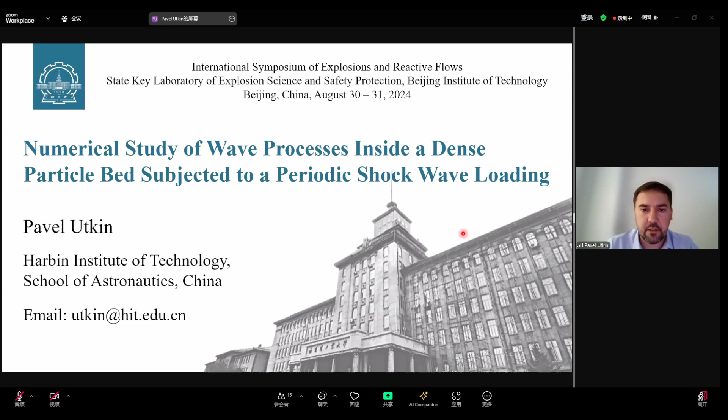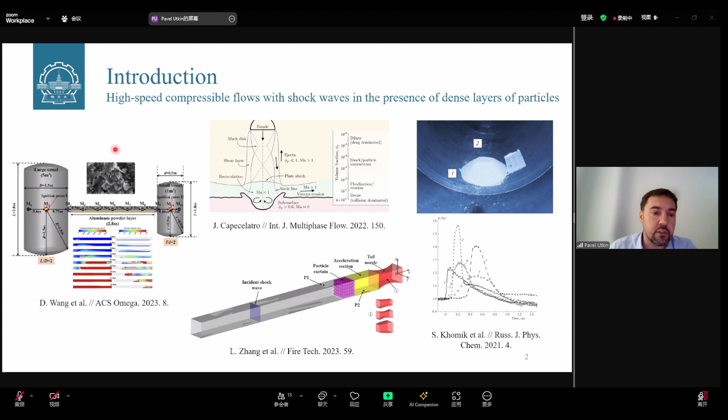The simulation of high-speed compressible flows with shock waves in the presence of dense layers of particles, that is, layers with a significant volume fraction of particles, is relevant in various fields. These simulations arise, for example, in explosion safety issues, such as dispersion of particles behind a shock wave during dust explosions, or explosion safety coatings. They're also relevant for the development of promising fire extinguishing systems, where shock-induced gas particle jets play a significant role, or in aerospace research, for the interaction of exhaust plumes with the surfaces of extraterrestrial bodies during spacecraft landings, and many other applications. I have shown you just a few examples to prove the relevance of the topic of my speech.

As for modeling issues, there are two frequently used approaches depending on the choice of length scale: microscopic or macroscopic. At the microscopic scale, the particle phase is treated as discrete particles, and each particle is tracked individually — this is the Eulerian-Lagrangian approach. At the macroscopic scale, the particle phase is modeled as a continuum medium, and equations for a continuous media are solved. This is the Eulerian approach.

Eulerian-Lagrangian models, such as CFD-discrete element methods, can provide information regarding each particle's trajectory, position, velocity, and so on, and they have been widely used for simulations of interactions of shock with particles. However, such simulations are highly computationally expensive, although, as you can see here and here, Eulerian-Lagrangian approaches were used.

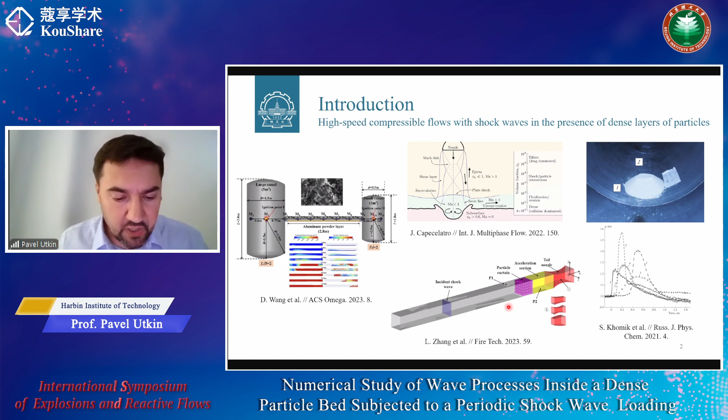On the other hand, the Eulerian approach becomes a more practical alternative to simulate real-world granular systems, where a large number of particles are taken into account and where the scale of the problem is greater than the scale of each particle. For highly packed granular beds, where particle collisions are dominant, Baer-Nunziato-like models are used, as well as models based on the kinetic theory of granular media, or other models, for example, models of academician Nigmatulin from Russia.

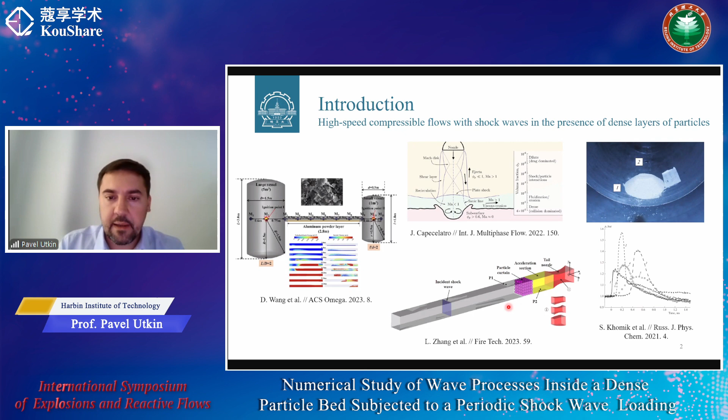So my talk will be about the usage of Baer-Nunziato-like models for the simulation of problems about interaction of a shock wave with dense layers or beds of particles. First of all, I'd like to remind the audience, or explain, what the Baer-Nunziato equations are, because the models based on these equations are used in my work.

Initially, this model was formulated for the problems of deflagration-to-detonation transition in heterogeneous explosives. In this paper — actually from a historical perspective there are also earlier works with almost the same results, but everybody knows this particular work.

The model comprises mass, momentum, and energy equations for the solid phase, and mass, momentum, and energy equations for the gaseous phase. So we have density, pressure, and velocity for each phase, and also volume fraction. So we have 7 unknowns, and we should add one more equation.

In this paper, the so-called compaction equation was added, but it was added in a special way. This equation, and also the terms C, M, and E that are responsible for the interface interaction, were added in such a manner that the entropy inequality for the mixture would be valid. So in this sense, this model is thermodynamically compatible, and this is a very good property of this model.

An important feature of this model is that both phases are compressible — the gaseous phase is compressible and the solid phase is compressible. So the solid is a sort of weakly or truly compressible medium, depending on the application.

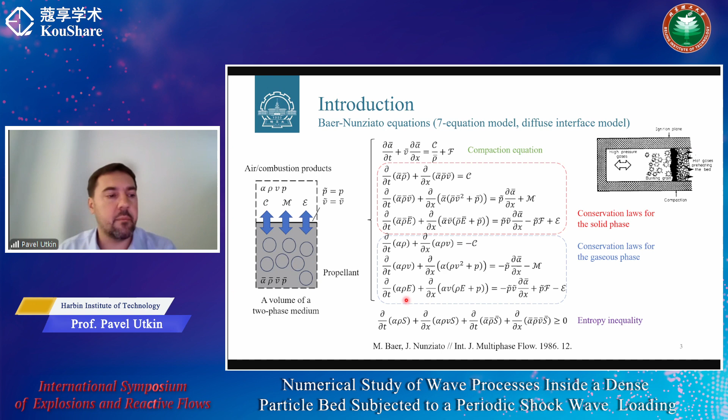This model has very good properties, which is why it is widely used now for many other applications, not only DDT in heterogeneous explosives. It's used for high-speed interactions of solids and fluids, and for example, two-phase flows in pipes, study of physics of single droplets or bubbles, because this model can be used when we have truly two-phase media, and also when we have explicit boundaries. So this model can be used for droplet-resolved to particle-resolved simulations.

There are many other subsequent developments of this model, simplifications, and so on. At the same time, in a number of applications, this model is used when the solid phase is very weakly compressible. So even when the solid phase is almost incompressible, we can relax this restriction and consider it as weakly compressible to have good properties of the model.

Apparently, for the first time, simulations of shock wave interactions with dense layers of particles were carried out in works of Professor Saurel. Now this team from Japan also carries out such simulations.

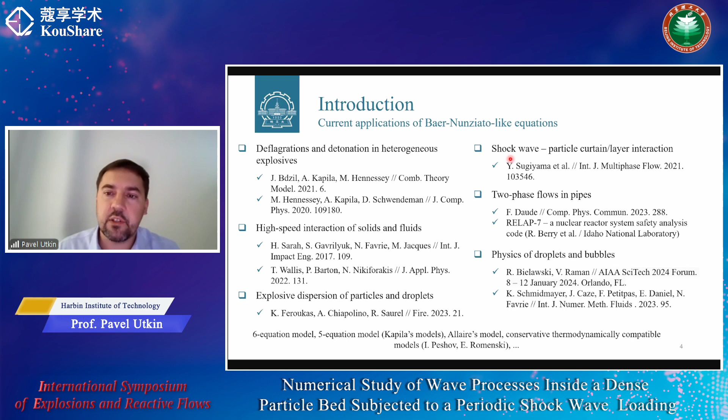I'd like to show you some background. I have some experience in such simulations. The problem is that there are few experimental works that can be used to validate and analyze the models for such flows, because it's very difficult to look inside the dense layer or curtain of particles.

For example, in this paper, the authors considered interaction of a shock wave with a dense curtain of particles. The shock wave interacts with this curtain, and they had three pressure transducers, one located upstream and two downstream, and they measured the reflected wave and transmitted wave.

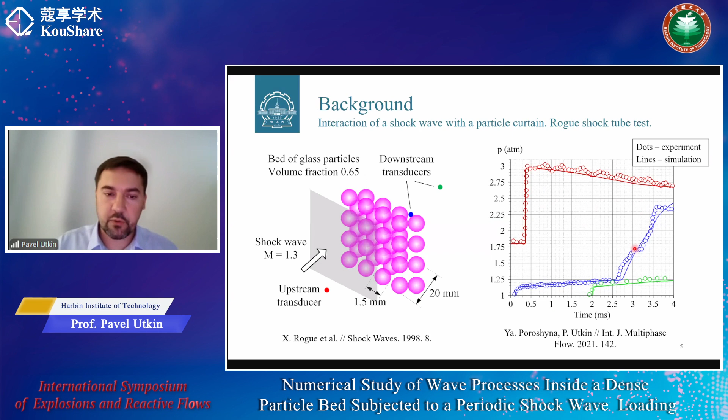Here the curtain was movable, so it moved. The difficulty from a numerical point of view is that we should correctly describe this motion of the cloud, and this blue transducer demonstrates the motion, the moment of arrival of particles. So we should be able to describe it correctly.

Another test case is interaction of a shock wave with a layer of particles on the surface. It is known from papers starting in the late 70s that under some conditions, the pressure transducer located under the layer on the surface can show a pressure increase. So if the dispersed phase is involved in the motion, then we can get the pressure rise under the layer of particles.

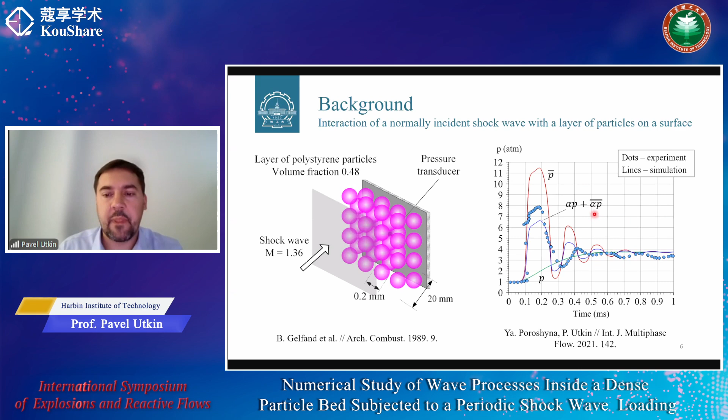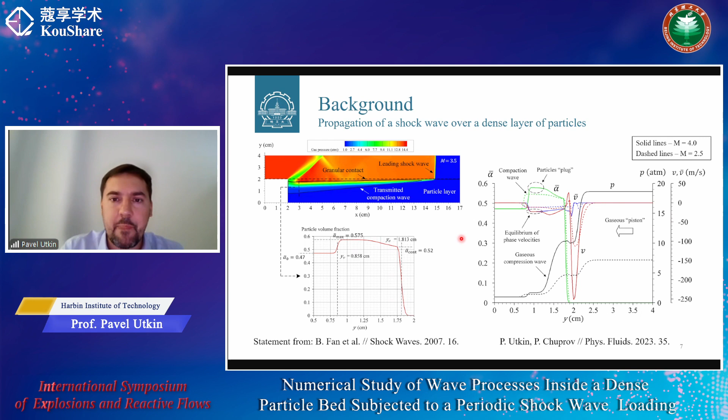I have shown you this background to demonstrate some experience in such simulations, and now I'd like to show the results on the current problem. These are recent results from experimenters at UFA Petroleum University.

These researchers are interested in the study of water-gas-saturated bulk media. For example, if you have sand with some volume amount of water, they considered experiments with a shock wave in a shock tube. So they have a conventional shock tube, and this is a section of granular media, comparatively long.

This setup differs from many others because they generated a shock wave and considered not a single impact of this shock wave on the particle bed, but also a reflection of the shock wave from the surface of this bed. Then the shock wave propagated, reflected from the upper wall of the shock tube, propagated down, and so on. So they had several impacts on the granular media.

These are the experimental data. The red line corresponds to the pressure signal on the pressure transducer D1, outside the bed. So just several pressure pulses that propagate back and forth.

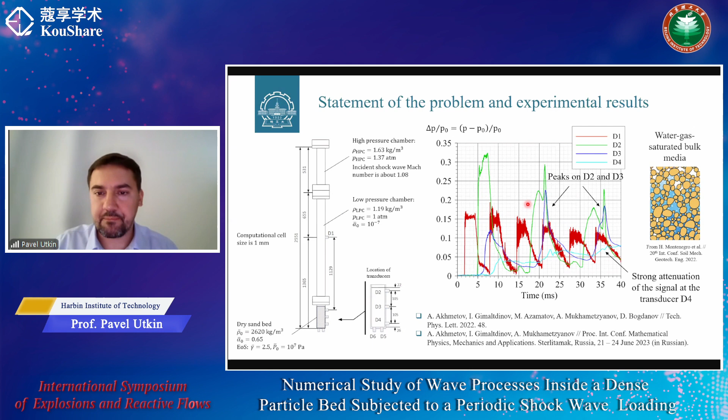This slide shows how the general Baer-Nunziato-like model was adjusted for this problem. A very important thing here is that we should take into account some realistic rheology of the particle bed. That is why we should introduce the effect of intergranular stresses inside particles, so there is a potential energy of compaction, or granular energy, inside the total energy of the solid phase.

We follow the initial paper of Baer and Nunziato, and also subsequent papers of Bdzil and Kapila, where they modified and changed a little bit the terms responsible for the work of compaction forces. Actually, we used the notations from the Schwendemann paper, so parameters with the bar correspond to particles, and parameters without a bar to the gaseous phase.

So this is, again, the sketch. We have the particles, and what does it mean, intergranular stresses? It means that particles could not be compressed more than the close packing limit, and this effect should be taken into account. When the volume fraction of particles becomes too big, we get higher pressure inside the particles that prevents further compression of particles.

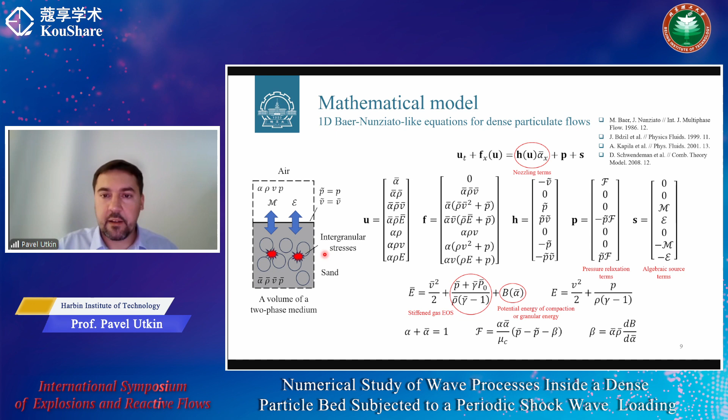These are the equations for the submodels. A very important thing is how we choose this function for the potential energy of compaction. In many papers, the following function is used: it's zero if the volume fraction of particles is lower than some critical value, and it's some algebraic function that should be calibrated according to experimental data if the volume fraction is higher than that critical value.

In the literature, you can also find a continuous function to describe this potential energy of compaction, but in this work we use this one from the Saurel paper, and it mimics the real physics of particles under compression. As I said, many other choices for this function are possible, and for sure all this affects the results of simulations.

We use just common standard formulas for interphase friction between gas and particles.

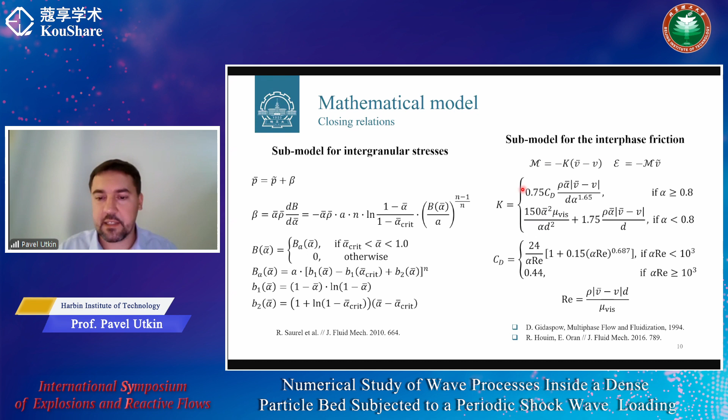As for the numerical scheme, as I said, the numerical solution of the Baer-Nunziato-like system of equations is not a simple question. The difficulties occur at the level of the mathematical formulation of the model, because in contrast to, for example, the Euler equations, we cannot define the weak solution of the system in the same manner, because of non-conservative products.

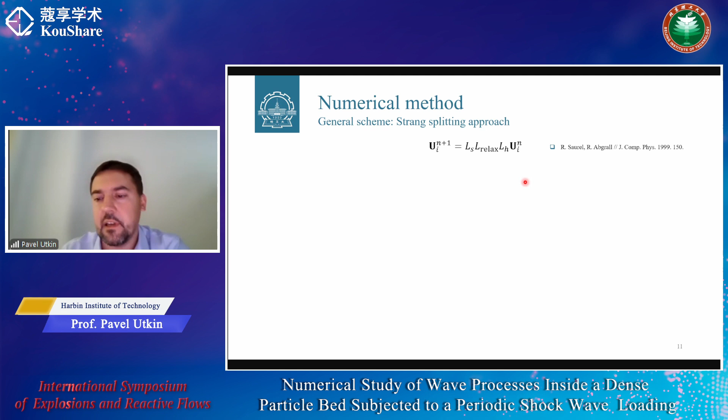For example, the Riemann problem solution for the Baer-Nunziato equations is not unique, and strictly speaking we should add some more assumptions to define one weak solution. Very often people do not pay attention to that, and they just use some numerical method, and the choice of weak solution is carried out implicitly at the level of the numerical method. However, I prefer to use this Godunov method from the Schwendemann paper, because at least we understand which assumptions were used to find the unique solution of the Riemann problem for the Baer-Nunziato equations.

So the general framework for the numerical method is the Strang splitting approach. First of all, we use the hyperbolic operator, which is very common for the solution of such equations. Then a relaxation process — from a physical point of view, we should relax pressures after the hyperbolic step — and then algebraic source terms. For the hyperbolic step, we use the Godunov method.

The key part is the solution of the Riemann problem, and the solution of the Riemann problem also automatically provides the approximation of the non-conservative terms. This is very convenient, although this U-star is a little bit difficult to construct.

We also have many cases depending on the gap between volume fractions of particles to the left and to the right of this discontinuity. All the details are described here in our paper in the International Journal of Multiphase Flow, about how to combine different cases for the solution of the Riemann problem for the Baer-Nunziato equations into one numerical flux.

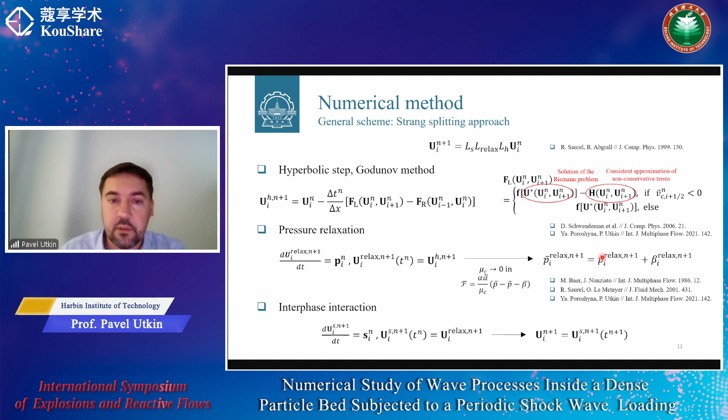This is the relaxation term, and finally we take into account the interphase friction force. So, in common words, this is the numerical algorithm, but each step can for sure be described in more detail if necessary.

So the results, simulation results. Now I'd like to explain how we can reproduce the experimental data and give some explanation of this.

Actually, this experimental effect can be called a new one, because I'm not aware of works in which this amplification of shockwave occurred inside this bed. Usually people consider the process on the surface under the layer, not inside the bed. For sure, there are papers by Britan and Gabi Ben-Dor with co-authors, but I didn't see such effect in their papers. So this is the whole length of the shock tube.

This is the first pulse generated by the high pressure chamber. This is a shock wave, compression phase, and rarefaction wave. It propagates. This is the location of the D1 transducer, and we can see this first pulse.

We can see some discrepancy, some error in comparison between simulation results and experimental data. I'm in contact with the experimenters, and I took the initial data from them. Maybe the problem is that the diaphragm was not ruptured by external means - it was ruptured by itself when the pressure in the high pressure chamber exceeded some limit. That's why maybe the parameters in the high pressure chamber were not uniform, and all this affects the process. So that is why there could be some error here, even in the incident pulse that impacts the bed.

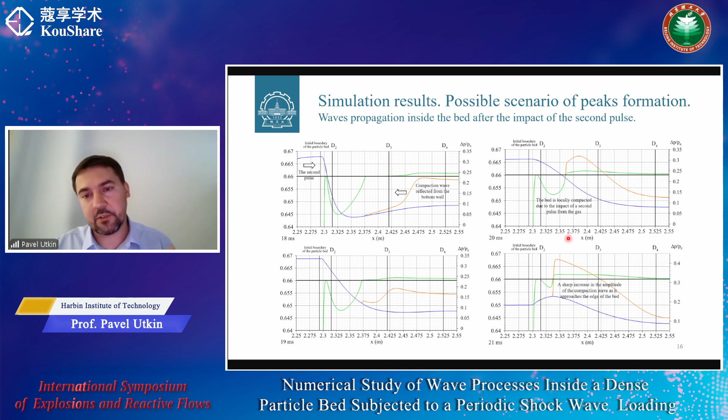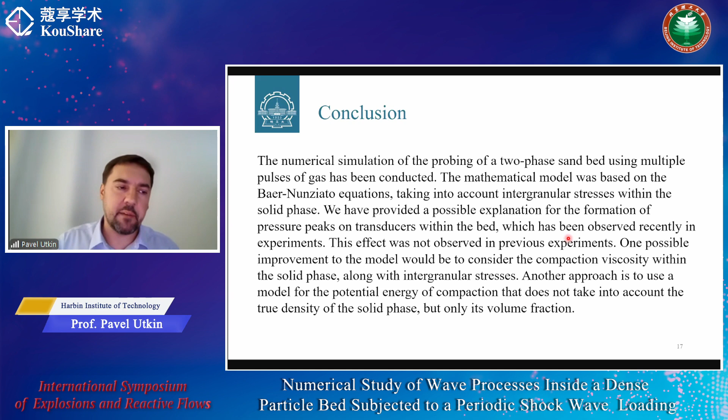But at the same time, there are many points to work on. We can take into account the finite value of compaction viscosity, different functions for compaction potential. So maybe this can improve the comparison of experimental and simulated data on the D4 pressure transducer.